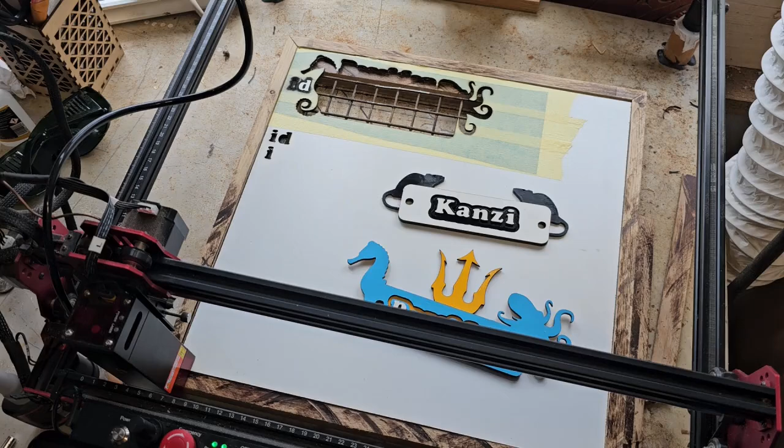Welcome back, guys. In this video we're going to be making one of these nameplates. You can make these for your kids' doors or your shed, whatever. They're really easy to make. All you need is a laser and Lightburn.

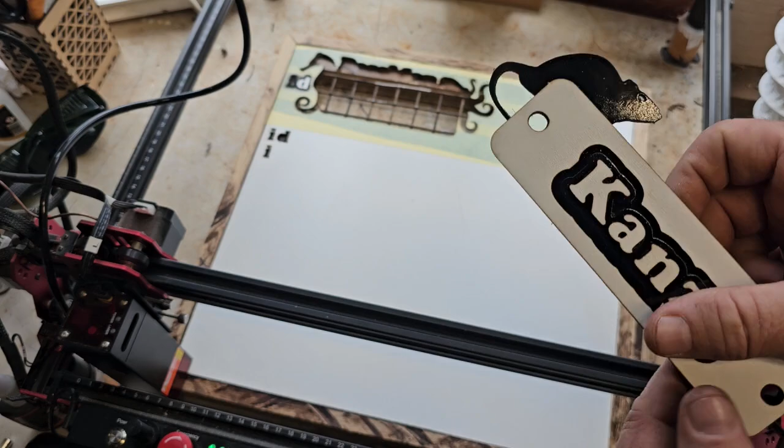You can get Lightburn free trial for nothing, and obviously the materials to make it - 3mm ply or 3mm MDF. In my case, this is MDF but coated in white matte paint, so you can paint it easy.

Now, instead of painting them - this one is painted - but instead of painting them I've been using sticky back vinyl, and I find it works really well.

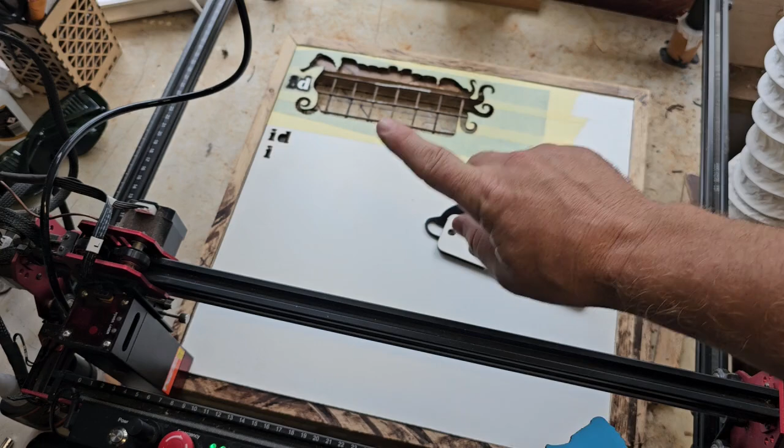And the process, you can see behind me the way I do it. I put the vinyl on and then cover it with masking tape so we don't get that charring effect, as you can see over there, look. Then obviously pick it all apart and stick it together with glue, and it just works really well. I mean, that needs cleaning, that little bit there, but still.

Anyway, let's jump over. What we're going to do is redesign this one first, because I want it to be vinyl and not paint. So I want to go grey, because when it's on the cage you can't really see what they are since it's a black cage. So we're going to redo this, and I thought we'll go through the process and you can use this to make your own signs, kids signs or whatever.

I mean, if you was to make these and sell them, how much would you get for that? 20 quid, 15 quid, I don't know.

Yeah, anyway, let's jump over to Lightburn and I'll show you how to make this one.

Right, so we've opened up Lightburn. If you're not familiar with Lightburn, there's loads of videos out there on YouTube you can go and peruse to get used to all the buttons. But for now, if you follow along, it's quite straightforward. I'm not going to go too fast for you - if I bore you to death, you can just skip along. I'll put some chapters in the video.

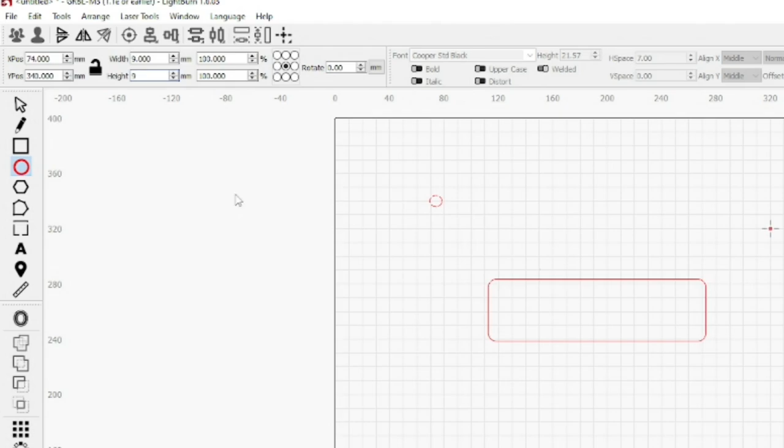Right, back up to our pointer. Let's hold down left key on the mouse and select that, and then we're going to just copy and paste, so we've got another one. Let's pop those - these are our holes for our cable ties to go in.

What you can do, if you go up to the top here, see how the pointer turns to a little line? If you grab that with your left mouse button, you can get a line so that everything lines up, so they're in the middle. If anything, we could move that a fraction. We're going to go there - let's get rid of that, just highlight and delete.

So this is our basic shape, this is what we're going to be working off. First thing we need to do is highlight the whole lot, go up to Arrange and group it so it's one item now.

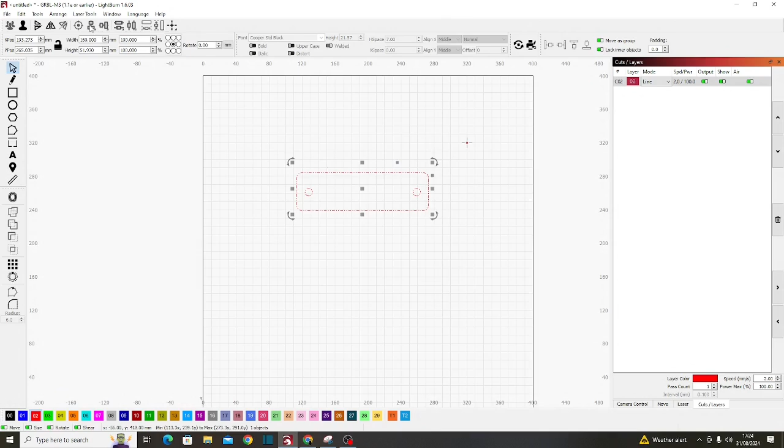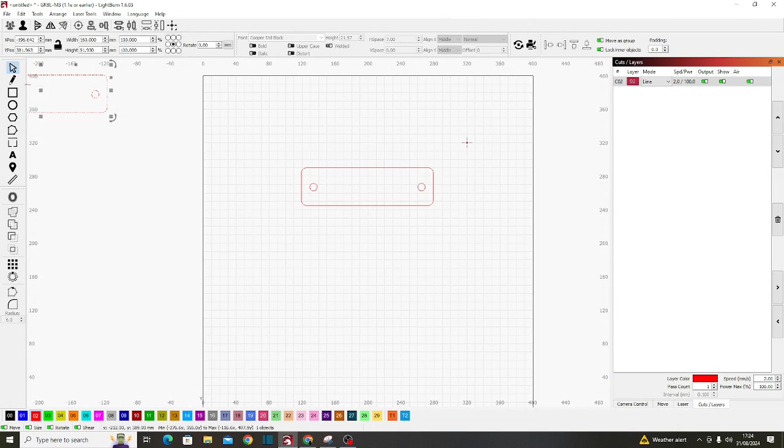So if I was to pick that up, see how I can grab the whole thing and move it around. So it's selected - we're going to copy and paste that again now, so we've got a second one of those. Let's keep that down there for now because we're going to need that in a bit.

So the nameplate I'm making is for Kanzi.

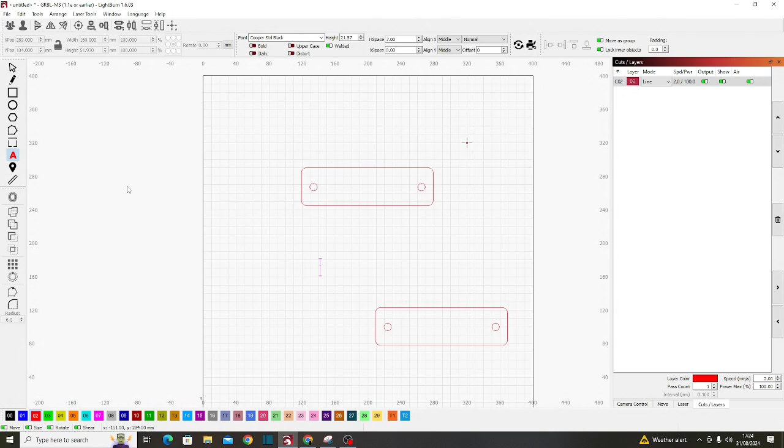We're going to go across here to where it's got the A. Click on that so it turns red, then click on the workspace. K-A-N-Z-I, okay, that's our lettering. If you go up here, you can actually change whatever lettering you want to change it to. Let's just keep it at that one for now.

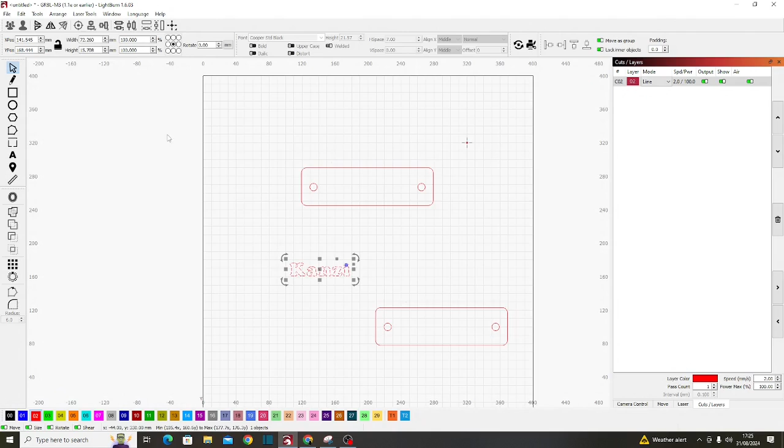Back up to our pointer. Whenever you use any of these buttons down the left hand side, you always go back up and press your pointer button, or you go escape. So if we select that and press escape, it'll take you back. If I grab a circle or whatever, instead of going back up there, it's just a shortcut - you press escape and it'll take you back to your pointer. But we don't want those, so we can delete them.

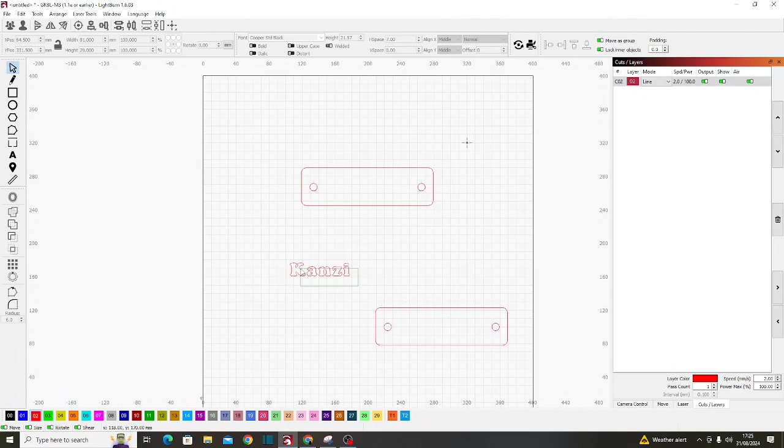Okay, so let's select our name. That looks fine to me. What we're going to do now is go over to this tool here, this is our offset shapes tool. So we're going to click on that.

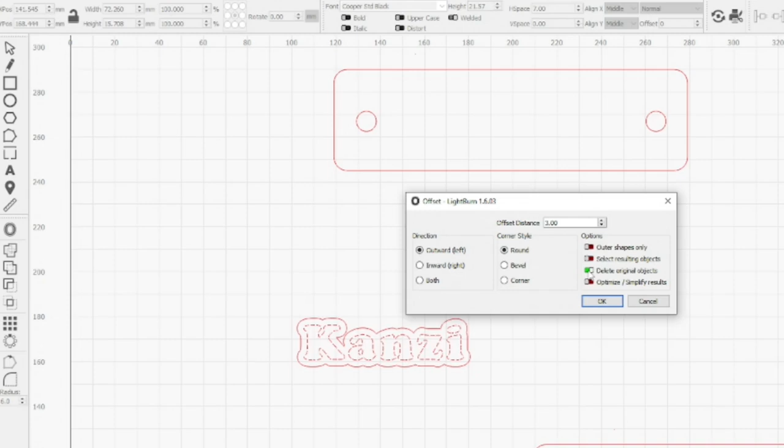We want an offset of about 3 mil, so that's about right for me. You can delete your original object if you wanted to, but we don't in this case because we want to keep the letter in, so we want to keep that like that. So we're going to hit OK.

We're going to grab that again, and now we're going to do the same offset, same 3. I'm going to OK it. So we've got 2 of those now.

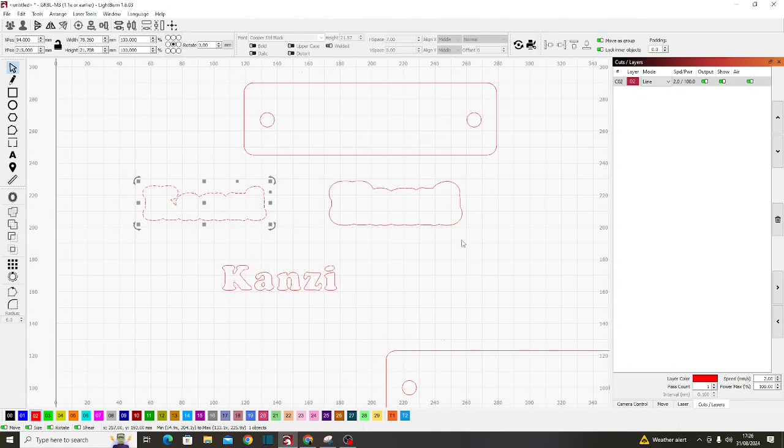If you look now, what we're creating is a stack. So we've got a stack of 3 there now.

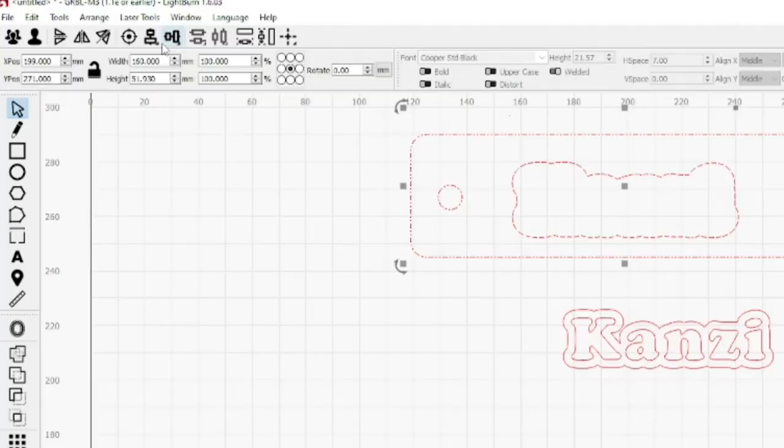So what we're going to do is grab this, the larger one, the outside one, and we're going to pop it in the middle. What you can do is highlight them all, go up to the top here, and hit that button - it'll take it to the center, but I want it just a little bit down. I want it around about there.

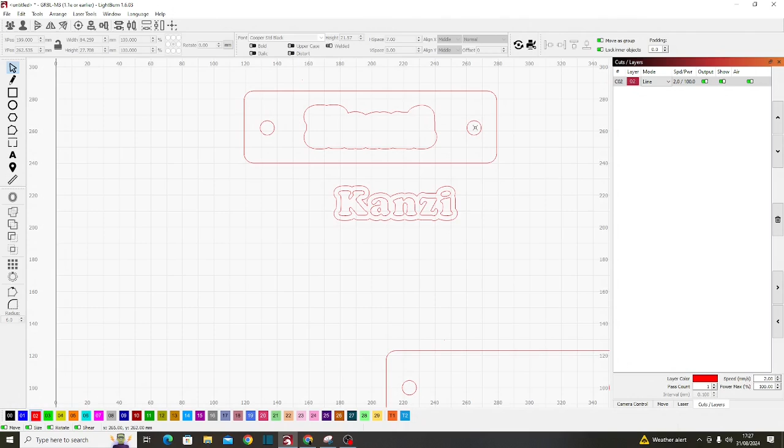So what we're going to have is when we cut this out, we're going to lose the inside of that, the inside of that, and the inside of that. So what you'll end up with is a little island in the middle, which is this, and then the lettering will go on top.

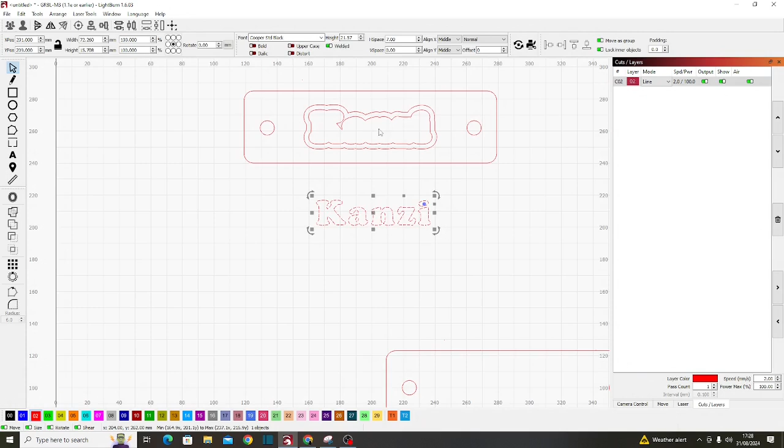So we're going to cut our lettering out separate. We don't want to waste our material, so instead of cutting this island here separate, we may as well just cut it out of that piece that we're going to lose anyway.

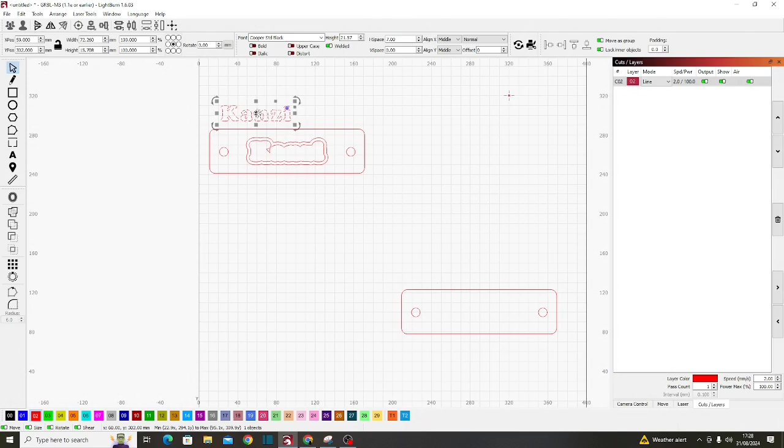Right, so that is our basic nameplate as it is. So when you cut it out, you're going to have that.

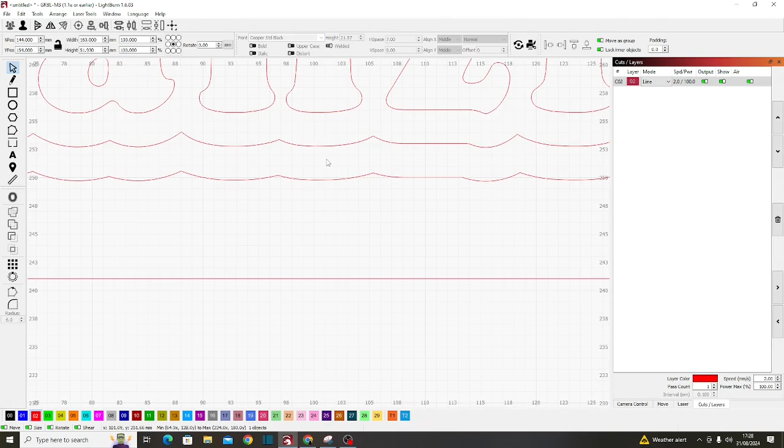But what we want to do is make this a little bit fancy. You're always going to need this base underneath this one, because if you remember, there's nothing in between here, so there'll be nothing for you to glue this section onto - you've got to have a backing behind it. This will be your backing.

But instead of having that just disappear underneath there, we're going to funk it up a little bit. We're going to make it a little bit special.

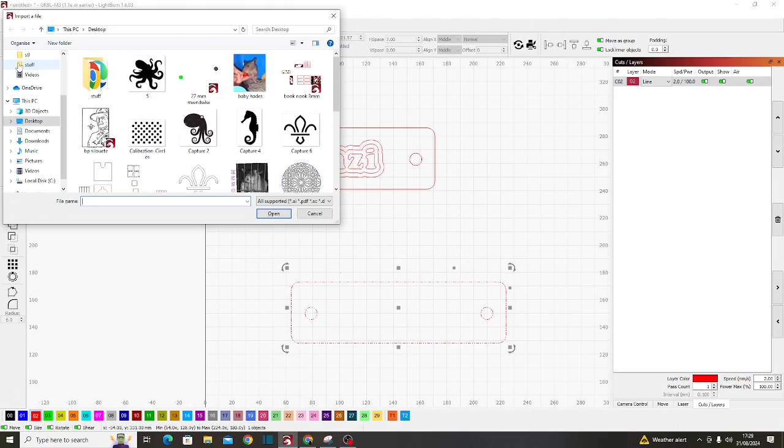So let's go over and import an image. We're going to go with a rat. Okay, so this is an image.

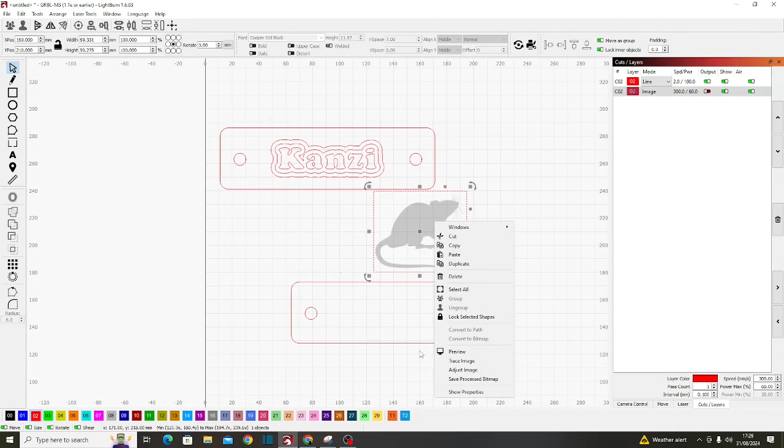We need to turn this into an STL, or a tool path now, a path for the laser to cut. So we right click - you can do this with any image actually. I'm going to go down to trace image, and let's fade the original. Now the purple is what you're going to see, but we don't want all these little wispy bits, so we want to make it as clean as possible. Let's move that slider down and get rid of those wispy little bits, because we don't want them, do we? Right, okay, yeah, that looks good to me. Press OK. Then you can grab your cut path off of there and delete that one.

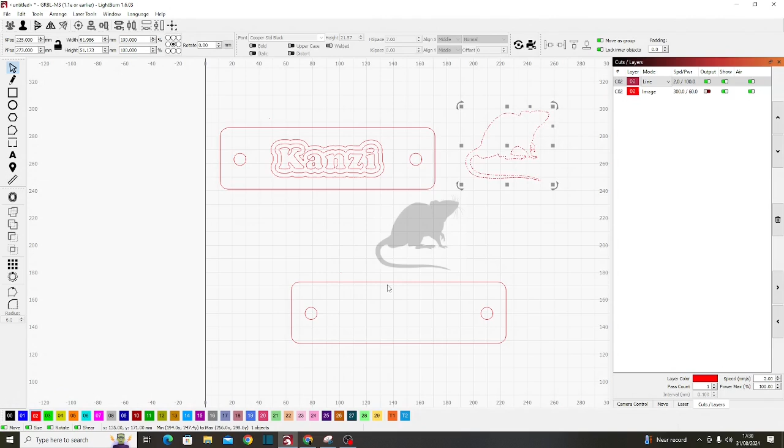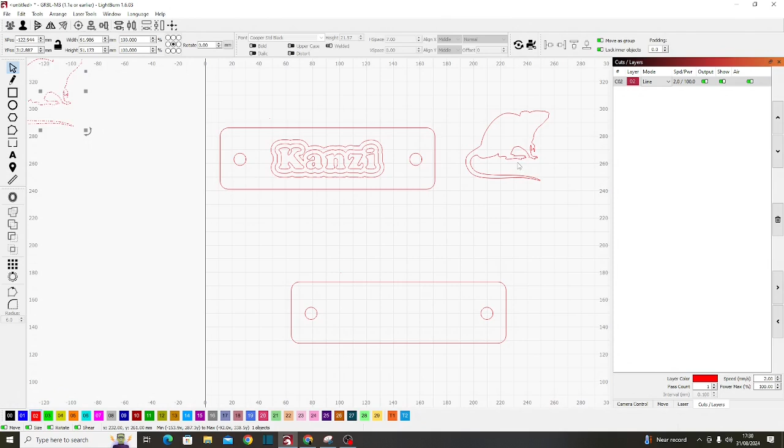Okay, we need two of these, so we're going to highlight it with our left button, and you can either duplicate it or copy and paste it. We'll go up, copy and paste it. Control C, Control V works as well. So there's our other rat, but we want to mirror this. We don't want this pointing the same way. So let's go up here and switch him around. See what I did there?

Up here, just under the arrange button, you've got a mirror option.

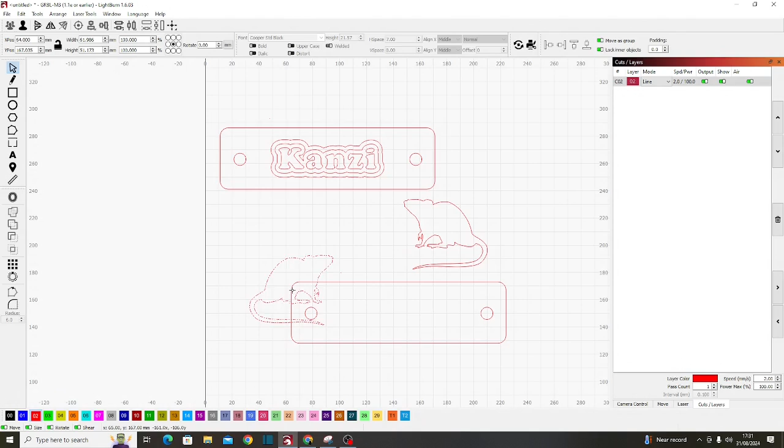So let's grab our rats, and we're going to put them there like that, so we can see that they're rats. And then that one will go about there. You know what, let's use that line and get them perfect, which looks pretty good to me. Okay, let's get rid of that now.

They're a great tool, these are, and you can come from this side as well, and you can line things up, and you can put as many of these on. They're not a cut path, they won't cut, they're just literally for you to get guidance.

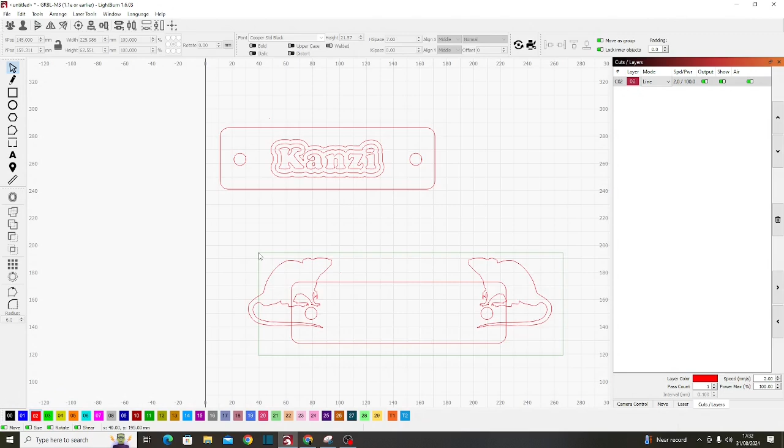We're going to use the Boolean tool now, because we want to cut this bit out. We want this to disappear, we don't want to see these here. We just want that to be one solid piece from here all the way through. See what I just did there? I hit the Boolean tool, and that removed all the inside, so now we've got that shape.

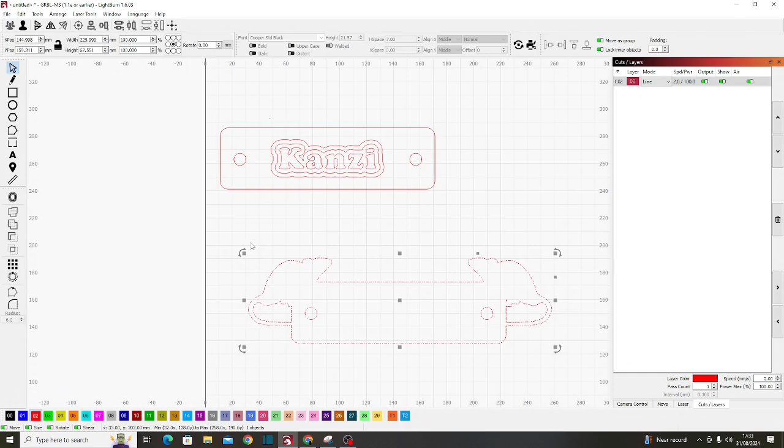Let's get rid of that, I don't know what that is. We'll go up, ungroup it all, zoom in, highlight that and just delete it. We don't need that, do we? That looks pretty good to me. Slightly off, but you know what, I'm happy with that.

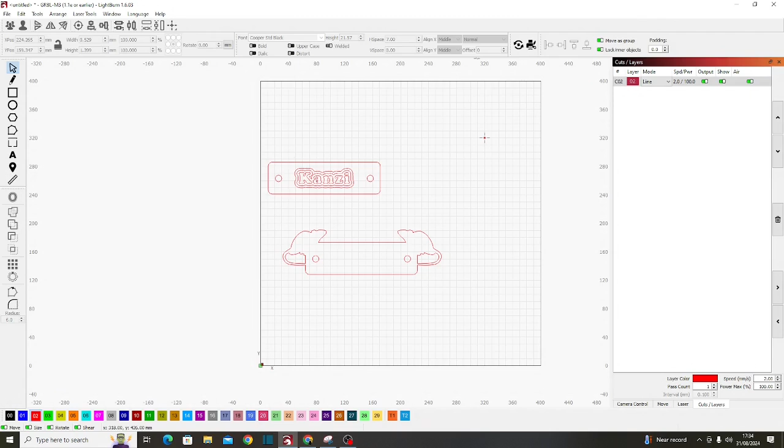Right, so this is our actual cut area. This is 400mm by 400mm. If I go to camera control, we can update that.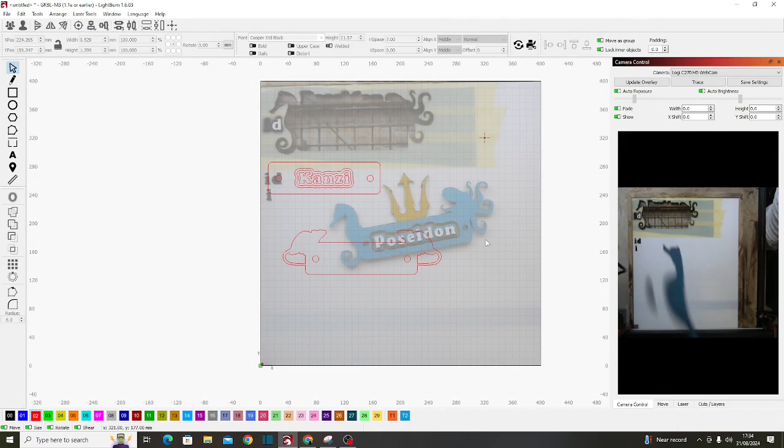So what we're going to need to do now is move these out of the way, and we'll switch back to the other camera. What we're going to do is stick our grey vinyl down.

The wife wanted grey because she thinks they'll stand out a little bit better. So the bits we're going to do is that is going to be grey, and then where you can see the black inside there, that's going to be grey as well. I think it's going to look pretty cool. And then we're going to leave the white on the outside, I believe.

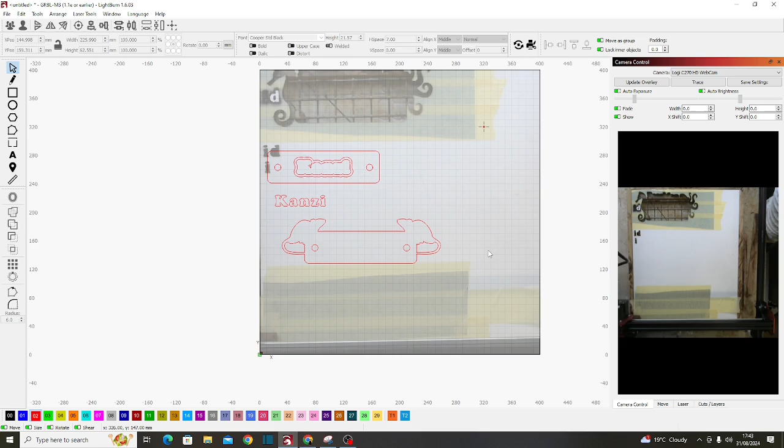Okay, cool. Right then, let's head back to the computer. Right guys, we're back on LightBurn.

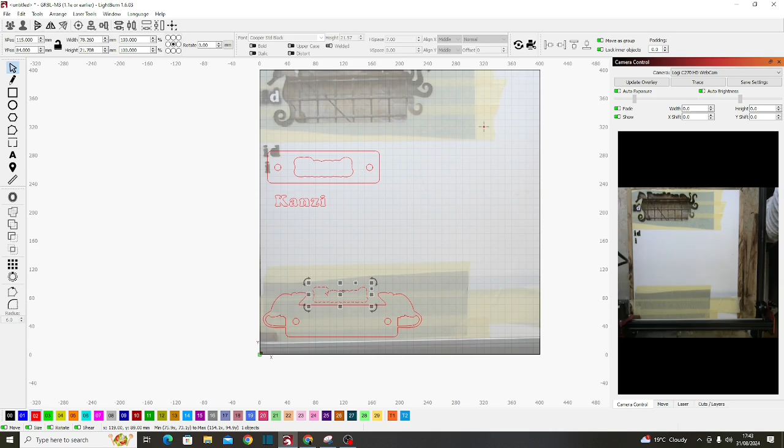So what we're going to do now is we want to drag this to the area that we've just masked off, and we also want to grab that, don't we? Do we want that? I think we do. I think we forget what I said a minute ago. I think we want that in grey, don't we? Because yeah, we do. We want that in grey as well, because we've got black and black. Yeah, we'll do that. Right, let's have a little look at it.

So these are white, so these need to go up there. Okay, right, let's have a little look at where that's going to be.

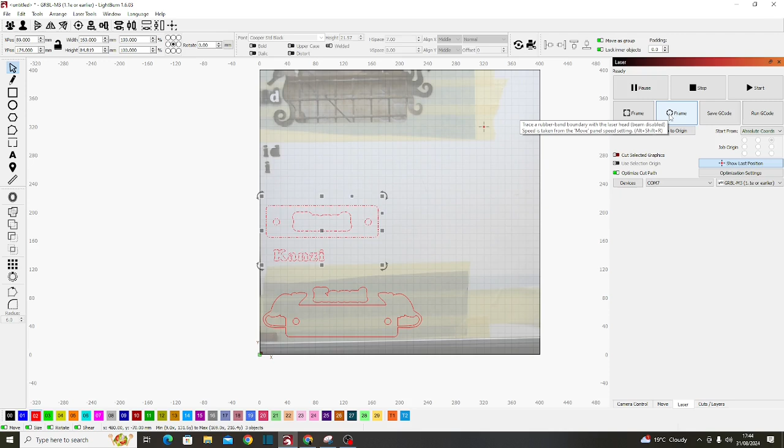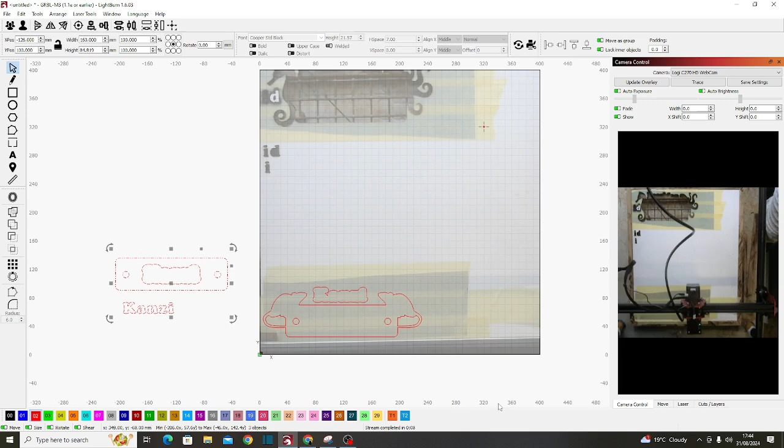I'm going to move those off screen for a second because I want to make sure that this is in the right place. Okay, so let's frame it. So that needs to go down a little bit, just a little touch. Let's frame it again.

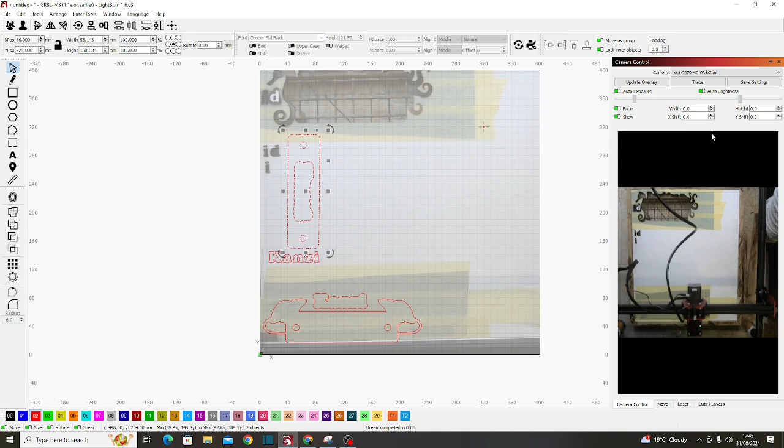Yeah, that's hitting the grey, that's in the grey, so we know that can go up there, and just to save a little bit of space, we'll put that there. Okay, now let's have another look at this now, see where it frames.

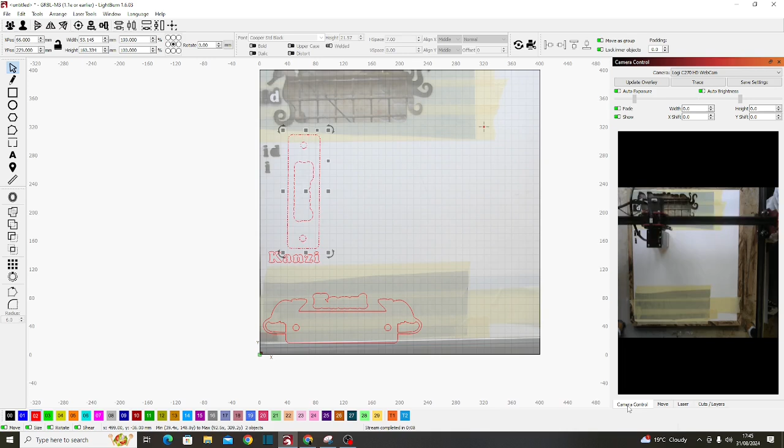That'll do, mate. Cool. Right, let's cut it out. So we want to go to cuts and layers.

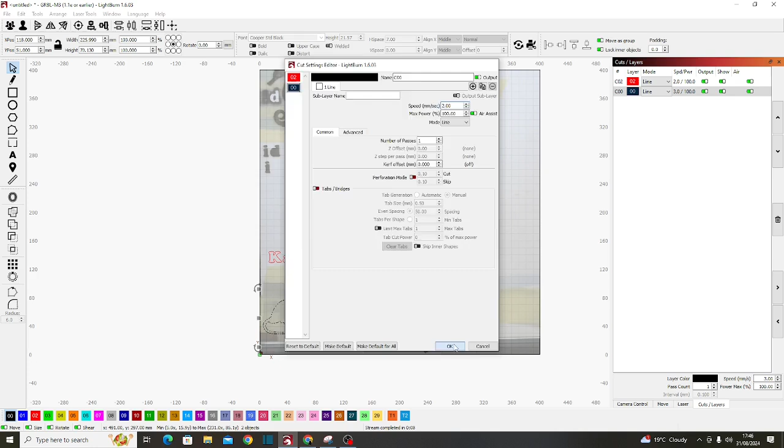What we'll do is change this to black, and we'll have that at 2 millimeters a second, so we get one cut straight through, no messing around. And the red is also cut 2 millimeters per second, 100% power. We'll have it cut in black first, so we'll drop that down so it cuts black first and then red.

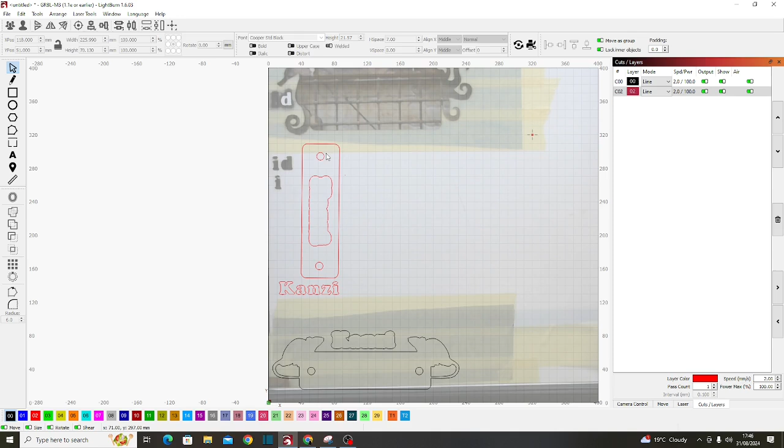Let's just double check everything is okay. Nothing's moved from there. In fact, this isn't a bad thing to do, just to make sure that these all line up, which they do. Okay, cool. So let's go Control Z, back to there. Control Z works great on everything, doesn't it, if you want to go back a step.

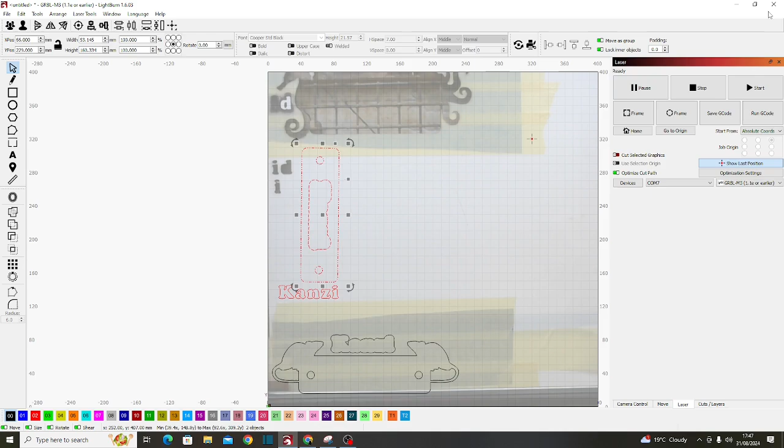What I'll do now is switch to the other camera and turn the extractor on and we'll start cutting.

I'm not using any activator or anything like that. I find that the thick kind of stays where it's put, and that's what we want here. We don't want the glue running out and you see a shiny bit. So I'm just going to eyeball it up and then lift it up and kind of push it down and it will center.

Right, there we are. Make sure you get this the right way around as well, because in the past I have actually got this upside down. That's where it should be.